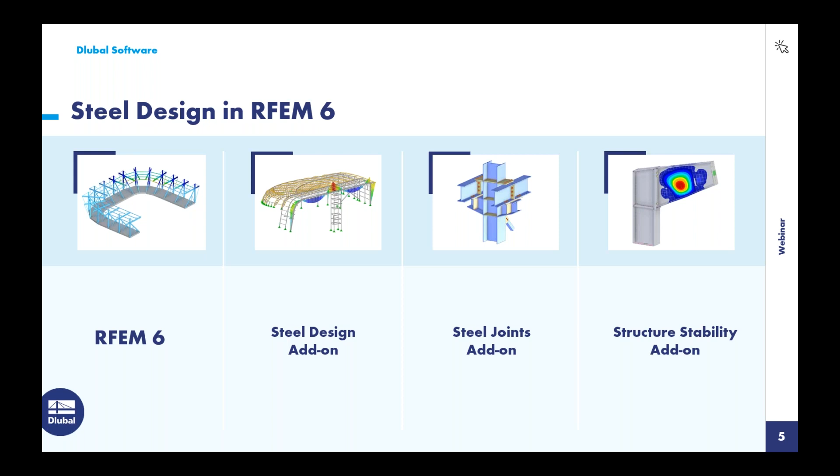Today we'll be focusing on the steel joints add-on. Within this same RFEM model, we can carry out the connection design according to AISC. I also mentioned the structure stability add-on - this is needed if we want to carry out an eigenvalue analysis for our connections to determine the various buckling mode shapes, which we'll see in our example today.

Our steel joints add-on is unique in the sense that for every single connection, we generate an FEA model underneath the hood. So we might be wondering, what is the benefit of FEA for steel connection design when compared to standard analytical calculations? The first and probably most obvious is that we can now design these non-standard connections.

We're no longer limited to standard beams, to columns with maybe one or two braces, but rather any connection that can be created with these various components can be fully designed according to the AISC, such as the example you see on the right-hand side.

This does include components and members both in plane and out of plane. So we're not restricted to design in a single plane, but rather we can include all of these elements at one time for the full design.

We also can consider complex loading because we're integrating the full global RFEM steel structure with the connection design. We have the ability to consider all of the loading within RFEM itself - whether member loads, point loads, or perhaps integrated with surfaces that have additional loads. This is all considered with the connection design with the automatic member end force transfer.

We also automatically generate what we call this submodel underneath the hood. So it really doesn't require a high expertise level - rather, if you just have a general knowledge of FEA, because of this automation, this will all be done automatically.

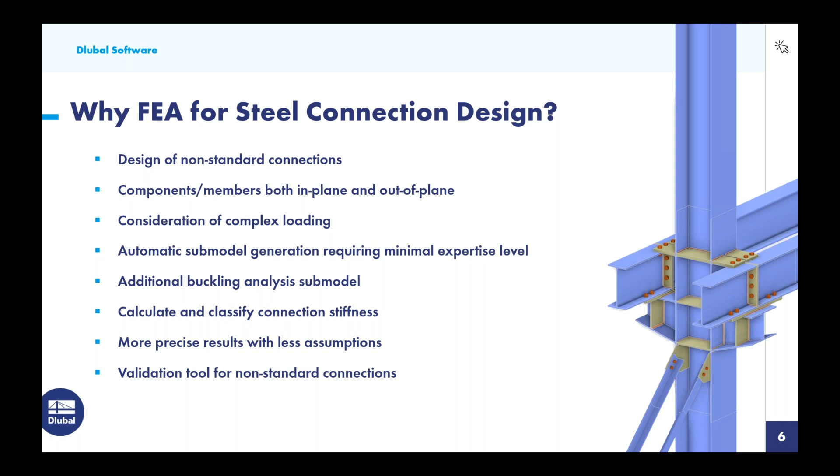So all in all, we'll have more precise results with less assumptions, especially for these non-standard or very complex connections. Even if we're using hand calculations or some type of external program, RFEM and the steel joints add-on can still be a great validation tool just to confirm that our assumptions are correct.

So let us talk more about this submodel that's automatically generated, and we can see an example shown here on this slide. So all of the members, beams, columns, braces, these 1D member elements, are automatically converted to 2D surface elements in this submodel.

So we're talking about the flanges as well as the webs. These will all be converted to those 2D surfaces considering the correct thickness and the material. We also consider the bolts and welds, which are also converted into 1D and 2D elements in this submodel.

Now, in the RFEM model, we likely have defined linear elastic materials for our members. In the submodel, this is automatically converted for all those surface elements to nonlinear plastic materials instead. So no additional add-ons are needed for this; it is automatically done with the steel joints add-on.

Additionally, we'll see geometric nonlinearities applied automatically in the submodel. So for example, with two end plates, we should see those plates release in tension, but in compression forces, we'll see them bear upon one another.

Again, we talked about automatic member end force transfer. So all of the load combinations, such as according to the ASCE 7, are automatically brought into this submodel as member end forces, and we'll run through the separate calculations for each load combination.

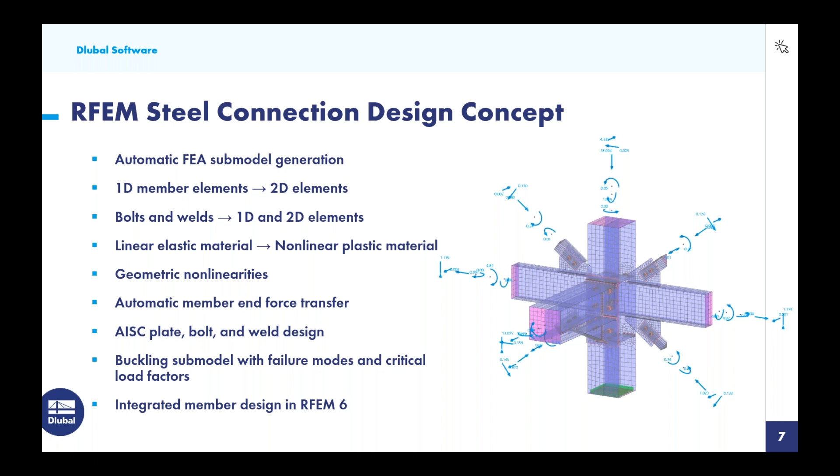So turning now to the AISC 360, the new 2022 updates that are relevant for RFEM only, we're talking specifically about connection design. This list is rather short, just one simple section to consider: Section J2.4a for welds and welded joints, in particular the fillet weld strength calculations.

There were some clarifications and revisions made to section J2.4a and b. The main reason is because we have adjusted equation J2-4 for fillet weld design to now include this directional strength increase factor K sub ds. K sub ds is calculated according to equation J2-5, unless we have a rectangular HSS, in which case this value should be set to 1.0.

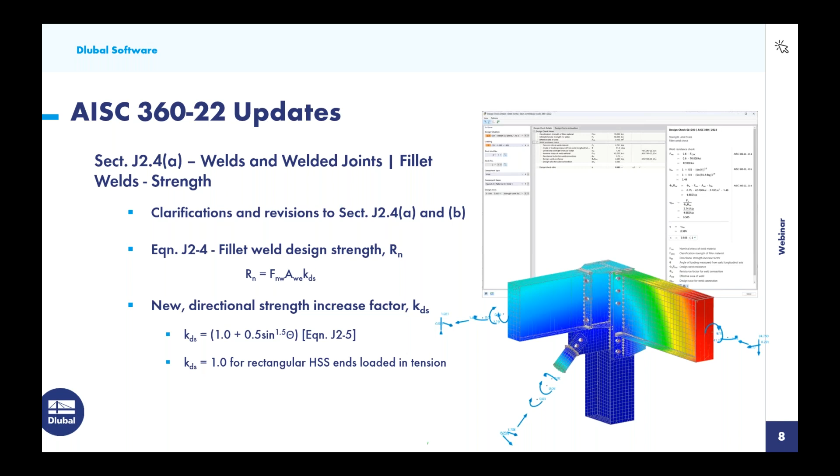So now moving on to a few of the updates that we have implemented in the steel joints add-on over the last year. This isn't an exhaustive list, but I just wanted to focus on a few of the main points. The first is the preloaded bolt input option.

So now we have the ability to consider these preloaded bolts, where the submodel automatically includes the applied bolt pre-stress force. In addition, we're going to see an increased surface friction coefficient for those plates that are in contact. Now, the load pre-stress within that submodel does come from AISC table J3.1, referencing that 0.7 factor times the bolt tensile strength.

So the advantages of a preloaded bolt or slip critical connection really increases the joint rigidity and tightness. Also, we're going to see that increased contact stress in the plates before additional loads have been applied. If we have a high vibration environment, we're obviously going to see better control of the loosening of the connection, and other benefits.

We also now calculate the connection stiffness and further classify this. So we have the ability in the steel joints add-on to calculate the rotational and axial stiffnesses for each member that frames into that connection point. Two values for each of these are going to be provided.

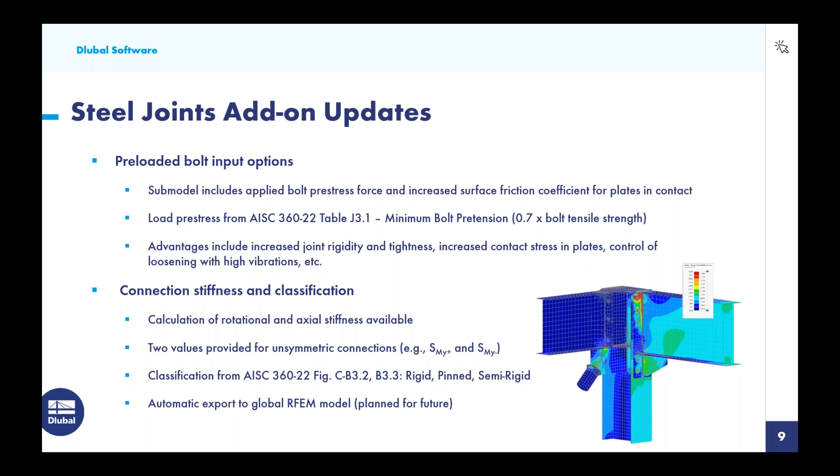A few components and capabilities that we have also added: inserted member is a new component, and this might be important for connections with stubs, or perhaps we have fly bracing, intermediate connection pieces, and so on. Another component we've added is called auxiliary solid. Sometimes with plates or members we require some modifications that are rather complex, so these new auxiliary solids with boxes, cylinders, or sections allow us to make these modifications, such as a plate cut, for more complex geometry.

We also have added a cap plate. This automatically positions a plate with the correct dimensions and weld definitions, for example, to the top of a member. We have a new rib component, which is a quick stiffener element that exists between two plates, and this is really going to reduce what previously took many other components to create. So a much more efficient option now.

We also have the connecting plate notch member, which we'll see in our example today. Also with the same connection, we can automatically weld the connected members to the gusset plate through member notches. This will be a very efficient input as well that we'll see.

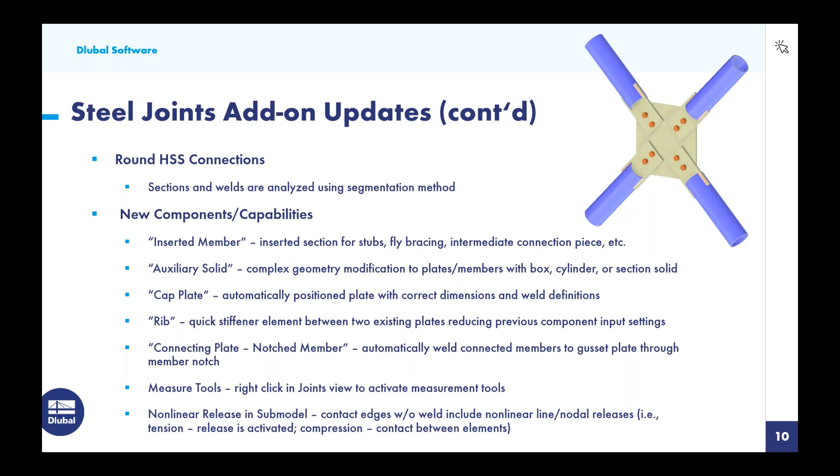All right, so we will move to our RFEM example today. For those of you who joined us last week for the full member design according to the AISC, this is an identical model here. I again will refer you back to that webinar to learn more about the member design, but let us quickly go through just a quick model review.

For the cross sections, we do have W12 by 50s for our columns, W18 by 40s for our girders, W16 by 31s for the smaller transverse beams. And then for our X braces, we have round HSS members, 4-inch diameter by 0.25-inch thickness.

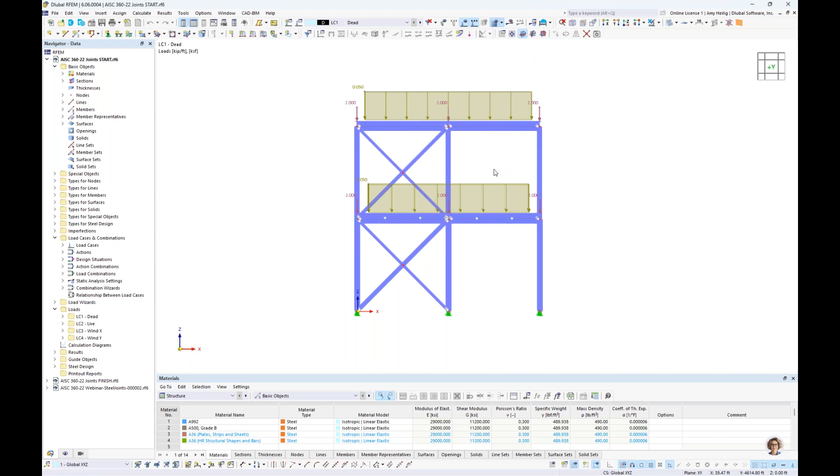As far as the loading, this is also identical to last week. So we have 4 very simple load cases for today: dead, live, wind in the X, and wind in the Y. Now I did make one minor modification here. When we compare to last week's model, you'll see here that for dead load we do have the surface loads applied to the surface load transfer elements, but I did apply additional member loads that you'll see here to those girders. I wanted to see a little bit higher internal forces and stresses with our connection design.

Additionally, same concept here for live load, that we have these surface loads applied, but I have also added a couple of point loads at 2 points along those transverse beams as well. We also have wind in the X direction, taking advantage of our load wizard here. We can right click to display those - these are just distributed to the members based on their tributary area. Same concept here for wind in the Y direction, and we can right click here to display those as area loads instead.

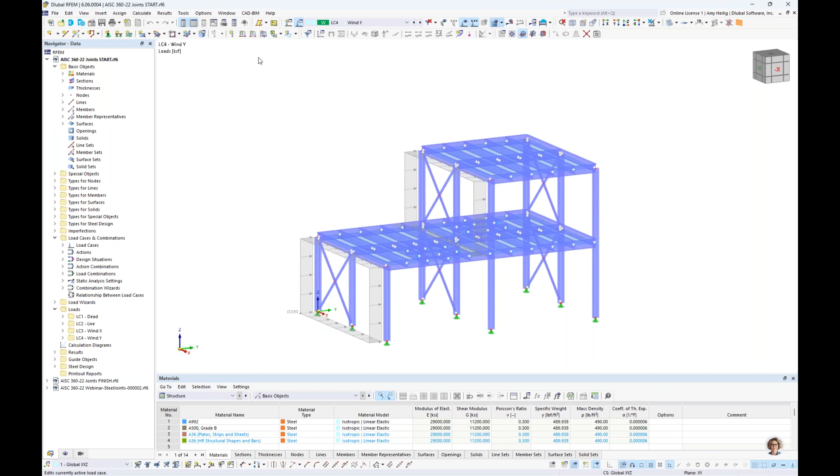Now, we also talked about last week how we are generating the load combinations automatically according to the ASCE 7, the new 2022 standard. Under the design situations, the program will automatically create 2 design situations for us. The first is going to encompass all of our factored load combinations.

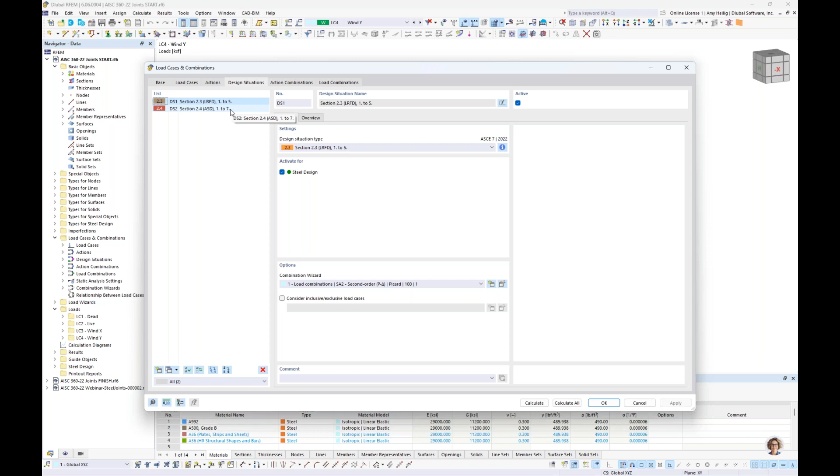This comes again directly from the ASCE 7. The second design situation includes all of the unfactored load combinations, and we use these for the strength and serviceability design of our members utilizing that steel design add-on.

Now for our connection design, we're only going to utilize this first design situation. Under the load combinations, if we'd like to see those individually listed out, we see our factored load combinations here in orange and our unfactored load combinations in red.

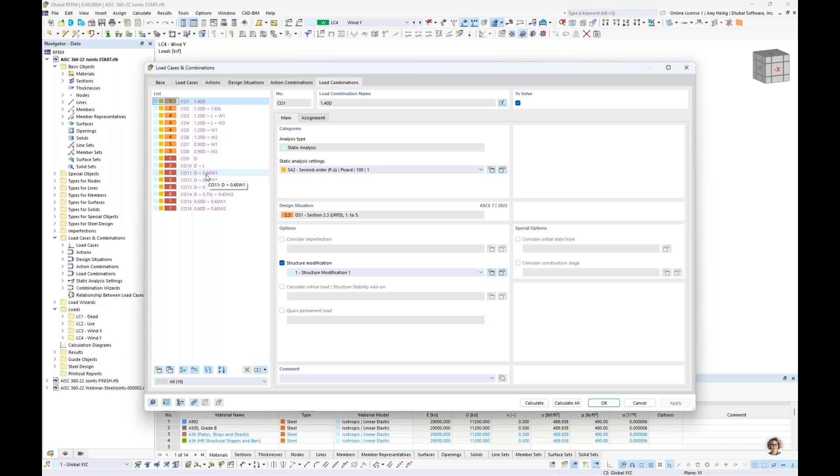To quickly revisit the steel member design, I will go to the table here and drop down to the steel design add-on. If you remember from last week, under the design ratios by member, ultimately we are going to get full member design here.

If I click on this back girder, you'll notice that all of our design checks from the AISC 360 are listed here. For each one of these, we further have the ability to take a look at the design check details. This shows us line by line with these various formulas, along with the code references and the relevant design ratio for the member design.

Once we feel comfortable here with the member design, what we would like to do is the connection. So I'm going to go back to the navigator and right click on my model name to access the base data dialog box. This is also available up here in my toolbar.

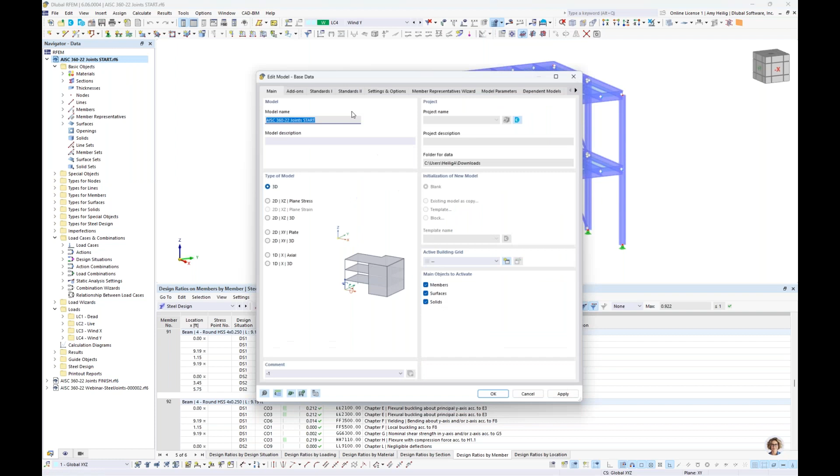Within this dialog box, under the second tab are the relevant add-ons that we have available within RFEM. We've already taken advantage of the steel design for the steel member design, but now we would like to activate here the steel joints for our connection design.

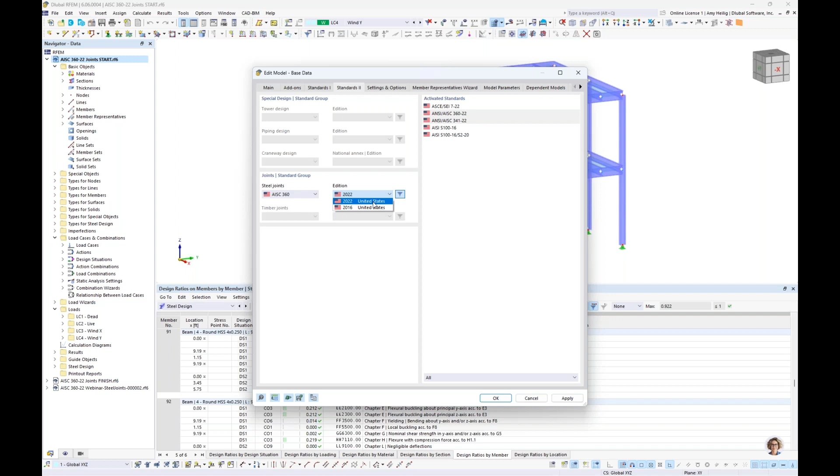Under the fourth tab is where we would set the relevant standard to the AISC 360. You'll notice here we do have the 2016, but we also have the most recent 2022. Once this add-on is activated, we're now ready to define here our first connection.

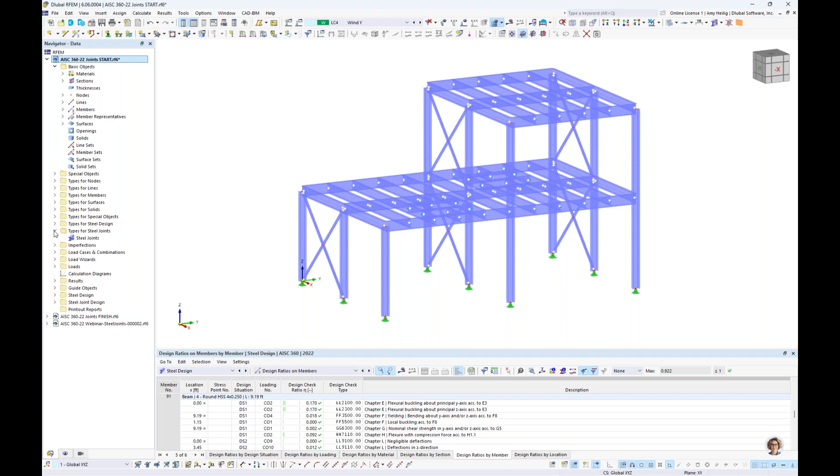I'll go ahead and turn off my surfaces graphically just so that we can see our members in better detail. Because we have activated here the steel joints add-on, we have a new folder within our navigator called types for steel joints. So I can right click to create my first definition.

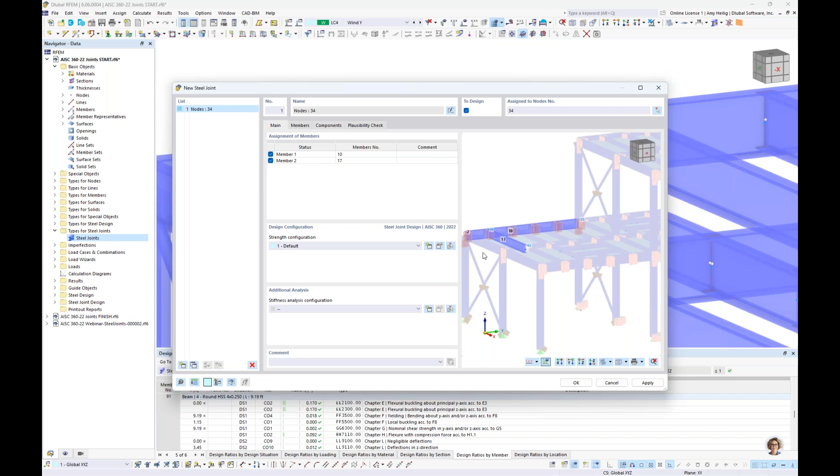Now, I'm going to graphically select my node here and we're going to focus on our beam to beam connection. So we just simply click on graphically node number 34. We see the relevant members highlighted here in our view, and under the second tab are the listed members.

You'll see here that we have 2 members within our table, and under the second column is the type set to continuous or ended. Member number 1 in the rear is set to continuous because it is continuous through this connection point. Alternatively, our second member here is set to ended because it does end at this connection point.

Because we are generating the FEA model automatically underneath the hood, we do need to support at least one of these members at the member start or member end at a minimum. The program will go ahead and suggest that it will support our member number 1 at the start.

So then we have our components. We can individually insert the connection components here. You can see the different categories where I can insert a plate, or perhaps a haunch, or maybe for this connection, we will take advantage of a cleat.

Now, alternatively, we can also utilize our library. So if we launch the library, what you will further see are some various connections already defined for us.

We have rigid connection under the general categories. We also have pinned, truss connections, as well as brace connections. Looking at our general pinned category, we then have further subcategories like beam to column. So when we look at beam to beam, we have 3 additional options, including a cleat.

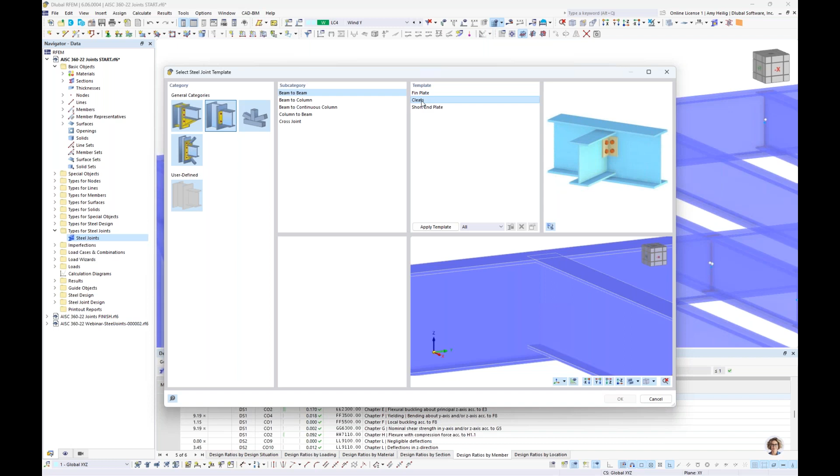So we can hit apply template, and the advantage of this is that these components that are already defined within this library will automatically be applied to my model.

Now, when I look at this preview, I actually don't see my cleat generated, and that's just simply because I need to switch these 2 members within the dropdown. My continuous member is actually member number 1, and the member that ends at the connection is member number 2.

And now we see this cleat generated graphically for us. We also can select here the material of the cleat.

Now it's possible to also define this later on under the individual component, but if we have our material available, we can select it here from our dropdown.

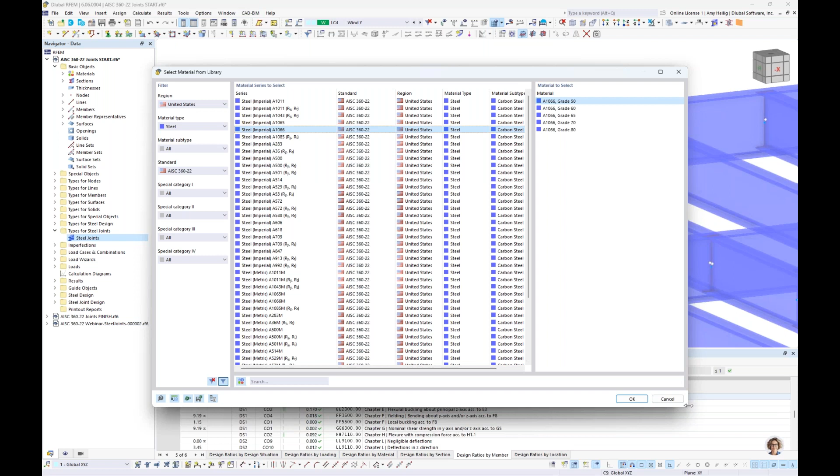Alternatively, if we do not see our relevant material, we can choose the new material option here. This will allow us to launch our material database where we can use our filters on the left to filter to the United States, to steel, and to the new AISC 360 2022 standard. Pretty much every material should be available here. You'll notice there are additional subcategories as well. So once we find our relevant material, we could select it within this material library.

Now for my scenario, I already have the material defined, A36 for structural shapes. I'll go ahead and select it here. So when I click OK, you'll notice that this component was automatically brought in here into my table. We will need to make further geometry modifications because this is just generalized to bring in the component, but we need to set it up specific to our model.

The first thing to define here is the offset between the 2 members. So we're talking about this gap here. I'll go ahead and reduce this to 0.25 inches and we graphically see that update. Now the material for the cleat has already been defined, but again, we can make changes if we'd like.

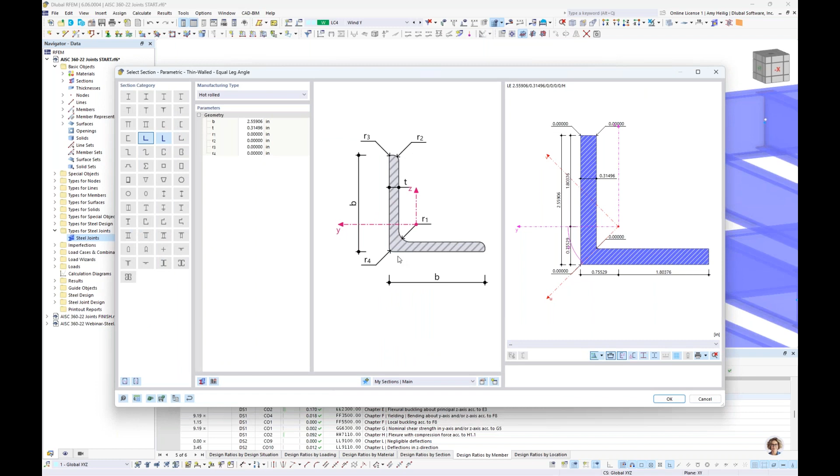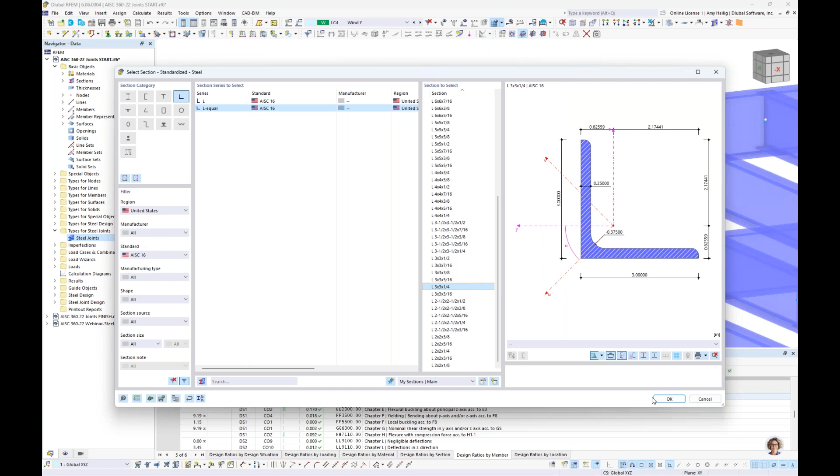The cross section for the cleat is automatically set to a parametric section where we can input the dimensions. Alternatively, if I hit this back button, I can take advantage of the standardized sections directly from the AISC. You'll notice the 16th edition database, which is the most recent, is implemented here. And I can go ahead and select a single angle 3x3 by 1/4 inch thick. So I click OK, and we'll see that cross section automatically update here.

Now, rather than defining the offset, I'm going to define the length and the position. So the length of this cleat is going to be set at 10 inches. The eccentricity will be set to 0 so that it's simply centered at half the depth of the beam.

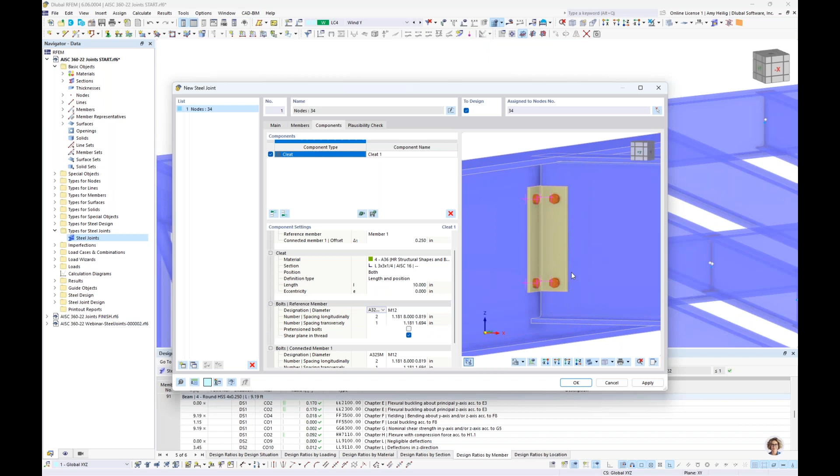Now we want to move on to our bolts. So we'll begin with the bolts on the left where we will set these as A325, 1/2 inch diameter from our dropdown. Currently there's 2 bolts defined, but I'm going to increase this to 3. The second input settings are the spacing. This is set up to specify the distance from the top of the cleat to the center of the first bolt, then the center of the first bolt to the second to the third, and so on.

So my spacing from the top of the cleat to the center of my first bolt is going to be 1.625 inches. I then hit the space bar on my keyboard and input the spacing from the first to the second bolt, 3.375. I hit the space bar once again and input 3.375 again for the second to third bolt spacing. Now I do not need to input the distance for that 4th spacing - the program is intelligent enough to know what that distance is, so it will automatically be input.

Now the number of bolts in the transverse direction are set at 1. If we want to modify the spacing from left to right here, we start off with the space from the edge of the cleat on the left to the center of the bolt, and this is set at 1.375. Again, if I just hit enter, the program will recognize the distance to the center of the cleat here automatically.

We talked about in the PowerPoint the new ability to specify here if they are pre-tension bolts for this slip critical connection. This is a simple checkbox here that will affect the submodel. It's not applicable for our connection, so we'll go ahead and leave this unchecked. We also have the ability to define if the shear plane is in the thread, which will ultimately affect the bolt strength in our calculations. This is a simple checkbox as well.

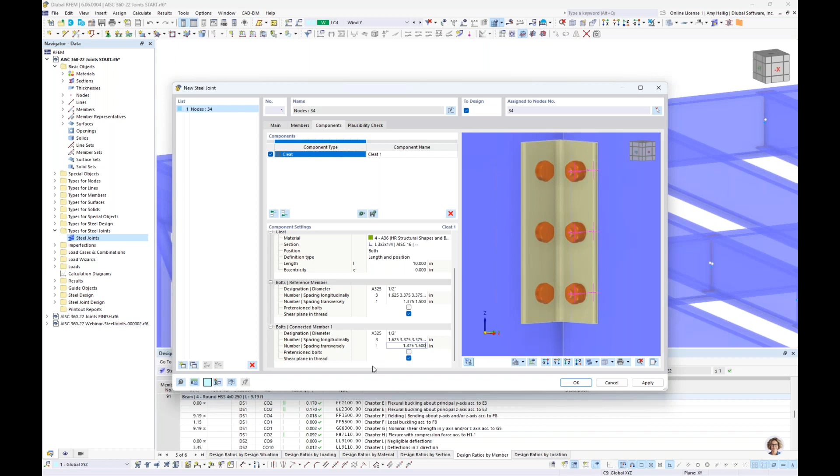Then we move on to the bolts on the right-hand side. So we will also specify here our A325 bolts, 1/2 inch diameter. We're going to increase the number to 3. Now, as far as the spacing, it's relatively easy to go back to the left side. I hit Control C on my keyboard, and then I can hit Control V to paste that to the right-hand side, so I don't necessarily have to manually input that in if we want to replicate the spacing on the left-hand side. Same concept here for the spacing in the transverse direction - we can go ahead and copy and paste there as well, and all of that will be updated graphically.

Now our cleat is complete with all of our input. If we go to the plausibility check, this will flag us if we have any errors within the connection. Remember, we are generating this FEA submodel underneath the hood, so if there's any errors such as overlapping elements, or perhaps a bolt is not placed where it should be, the program will flag you of this. Otherwise, the submodel cannot be generated.

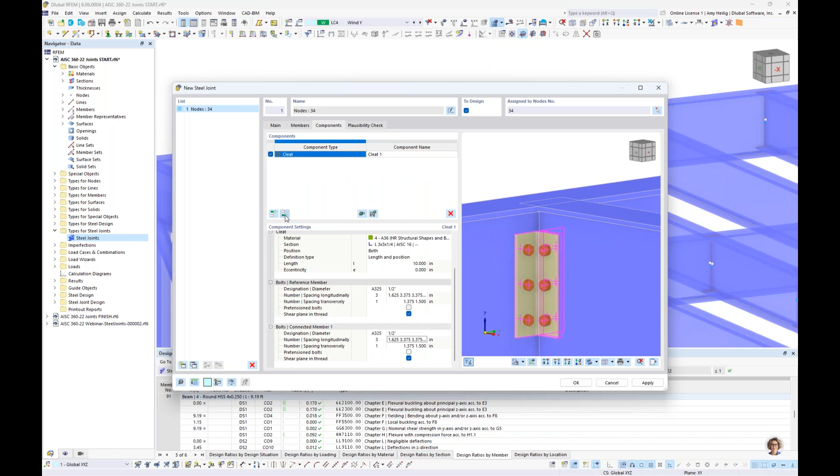In our case today, we have a couple issues telling us that the flange and the web from the smaller beam is conflicting here with the flange of the larger beam. So we go back to our components and we need to add in a new component here, and what we want to select is called member editor.

You can see how we can use the library options to bring in a starting point for a connection, but we can always add more components, delete components, or make modifications to those existing components.

Now with this member editor, what you'll see here is that we want to select member number 2 within our dropdown. Rather than specifying a chamfer, we will select a notch, and we need to give the notch some dimensions. So I'm going to choose here 0.75, hit the space bar, by 3 inches.

We also have the ability to add in a rounding here for our radius input, so we'll set this to 0.375, and we'll see that rounding affected graphically. Lastly, the program asks us if we want to apply this to both the top and the bottom. There really is no need to apply it to the bottom here, so we will just select side number 3 only. So now we see that notch.

We should check under the plausibility. There are no errors found, so therefore we've taken care of any issues there.

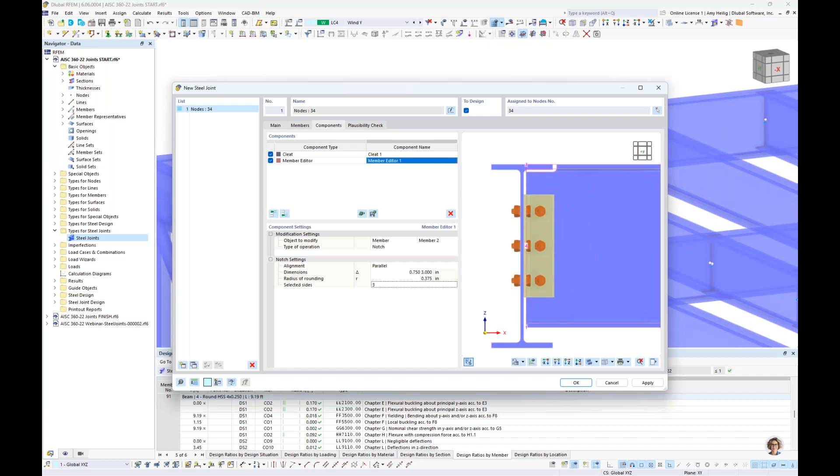If you want as well, just to show you, if we right click we can take advantage of that new measure tool. For example, we can choose the distance between 2 points, and the program will allow us to snap from one point to another. Graphically, this will bring up a separate dialog box showing us further information about that particular measurement. It might be helpful for any input that we want to place within the component itself.

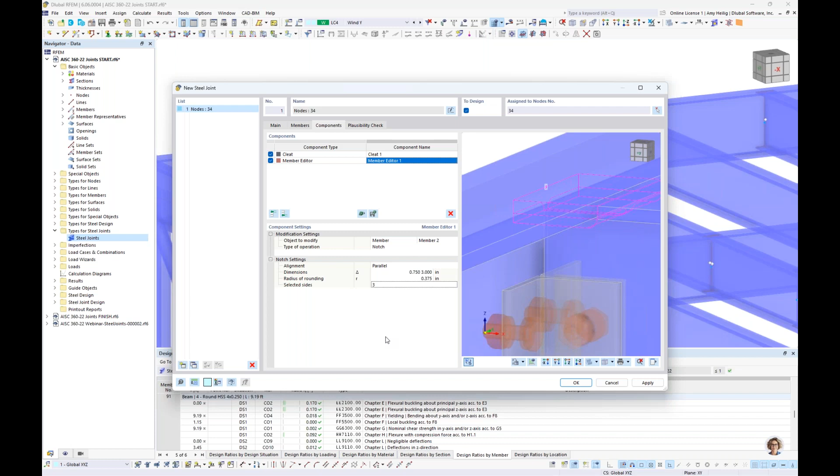So now that we are done with this first connection, we click OK, and we're brought back into the RFEM global model. You'll notice here that my connection is displayed graphically. We have the ability to also turn this to wireframe while still displaying this connection.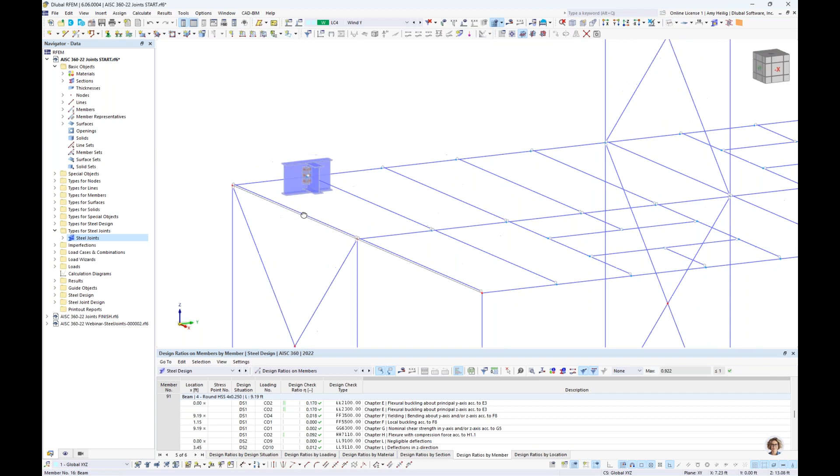I just wanted to explain that the full member design is still carried out from node to node. We're not going to stop this member here where the connection design begins, but rather the full member length is considered. In addition, the member end forces are taken at this specific node, not at this short distance away from the connection point. So this is really just a general view of that submodel that will be created again in the background.

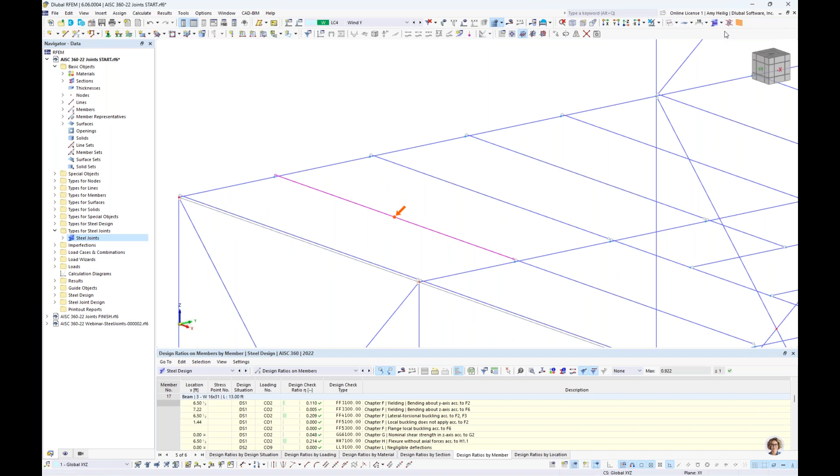You also have the ability here, if we go back to - I'll keep this in wireframe view - you'll notice that we have a new option here to show no joint model. If we wanted to completely hide it, we also have the simplified option here, or we can go ahead and keep it as a detailed joint model.

So this particular connection is also applicable to many other locations on this structure. You don't necessarily need to redefine the connection each and every time, but rather we can select multiple nodes to apply it to. This also is true for the other side of the structure, even though these elements are mirrored, as long as the geometry and the members are identical, this same joint can be applied to multiple nodes.

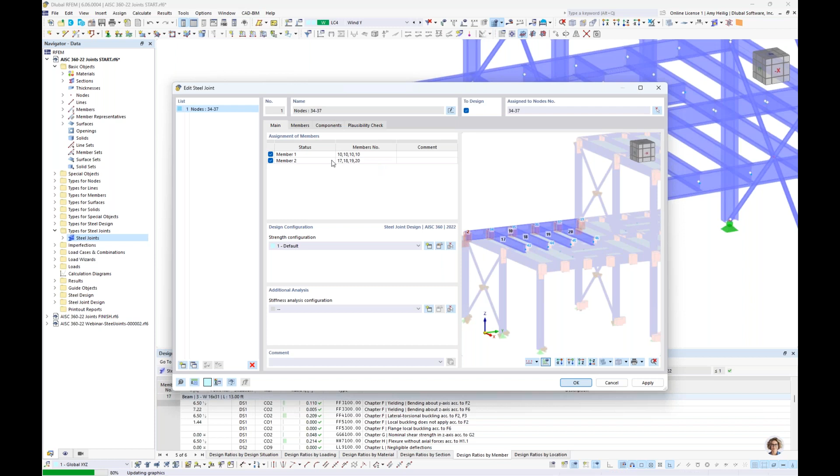So we go ahead and double click on it, and to take advantage of that, we can select here some of the adjacent nodes that again have identical geometry. So we select nodes number 34 through 37, we see them selected here in the graphical view. I click OK, and we'll go ahead and turn this to a solid view. We see those connections shown at each one of these locations, probably even more clear in the wireframe view.

So we are now complete with this first beam to beam connection. We want to then create our second definition here for our X-brace connection, so we right click to yet again create a new steel joint definition.

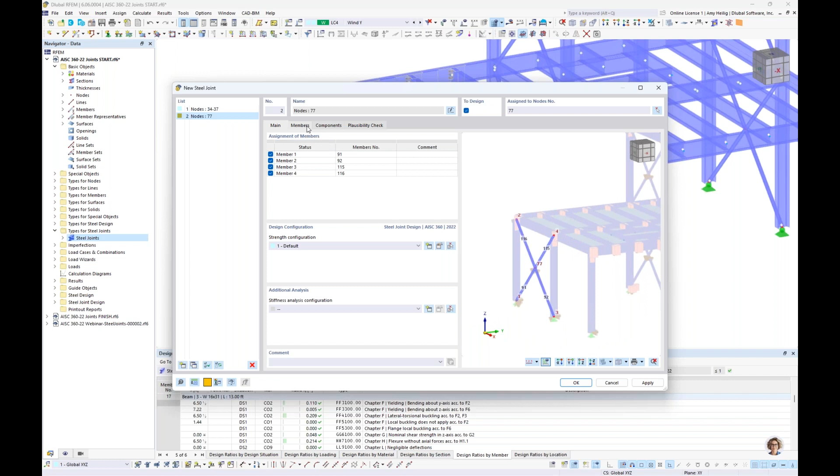We can still refer back to our previous one, but now we will select graphically here node number 77. We click OK, we see the relevant members highlighted, and under the Members tab, we see that all of them are set to the type ended.

That's simply because all of these members will end at this connection point. We do need to support at least one of those members for the FEA submodel, so we'll leave this as the default for member number 1.

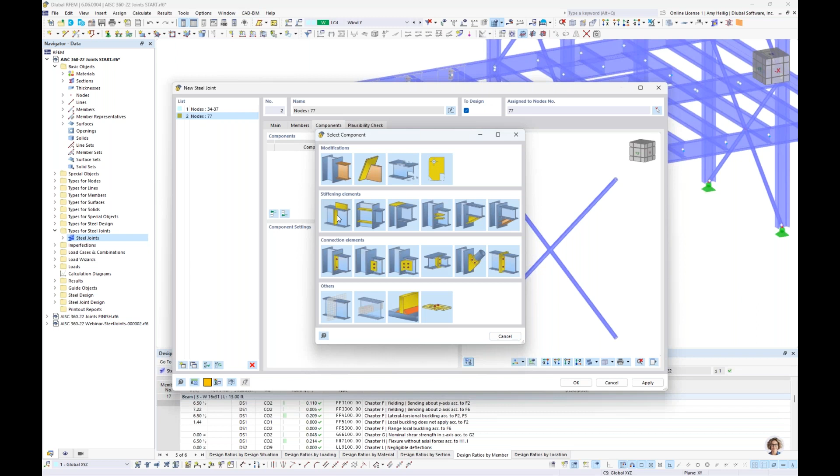Under my components, this is where I actually want to add in the individual components rather than using my library. So we will begin here by first inserting in a plate. We give the plate a material that's already available here within RFEM, so I select it within my dropdown as A36 for plates. The thickness is left as default here, 0.375.

The width will be adjusted to 13.75, and the height will also be 13.75. We see this adjusted graphically here as well. But clearly we need to make some modifications to this plate rotation.

So we can turn on the local axis system of the plate itself. I am going to rotate it 90 degrees about the plate's local x-axis, and further rotate it 45 degrees about its local y-axis. We'll go ahead and turn those local axes off, and now we see a better orientation here for the plate element.

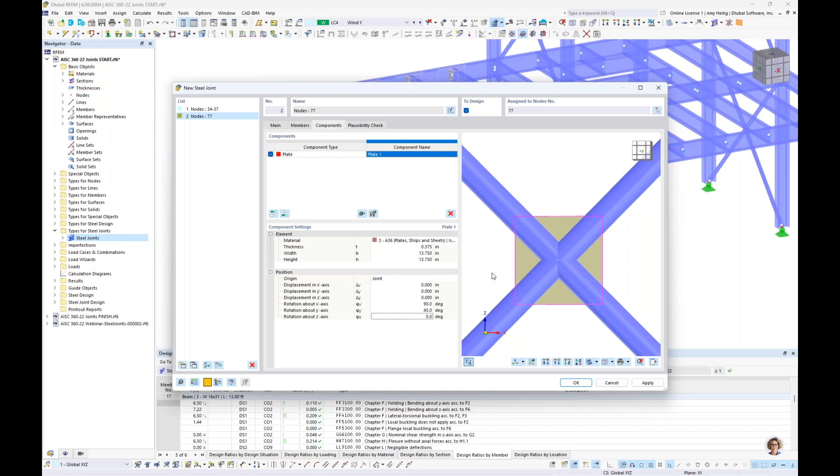We then move on to our second component, and this one is going to be the plate editor. We want to apply this to plate number 1. It will be a chamfer, and the dimensions of this chamfer are going to be 3 inches by 3 inches, applied to all sides here. And so now we just see that quick geometry change applied graphically.

We then add in our third component, and this one is going to be of the type connecting plate. As mentioned in the PowerPoint, this is a new feature we recently added where I can select member number 1, and we have the drop-down option to create a notched member with a tongue plate. If I rotate this around, you'll notice that this tongue plate was automatically created, attached to this bigger plate here by means of bolts.

We added a notch into the member, so we've significantly reduced the number of components it previously took to generate this.

Now moving on to the plate element itself, we want to adjust here the material to A36 as well. The thickness for the tongue plate will be left at 0.375. We want to adjust the offset though to 3 inches.

The remaining width is going to be set to 6 inches, and because I set my total X indentation to 9 inches here, and we also see the overlap in the remaining width set at 3 and 6, the program is intelligent enough to set automatically the width to 9 inches.

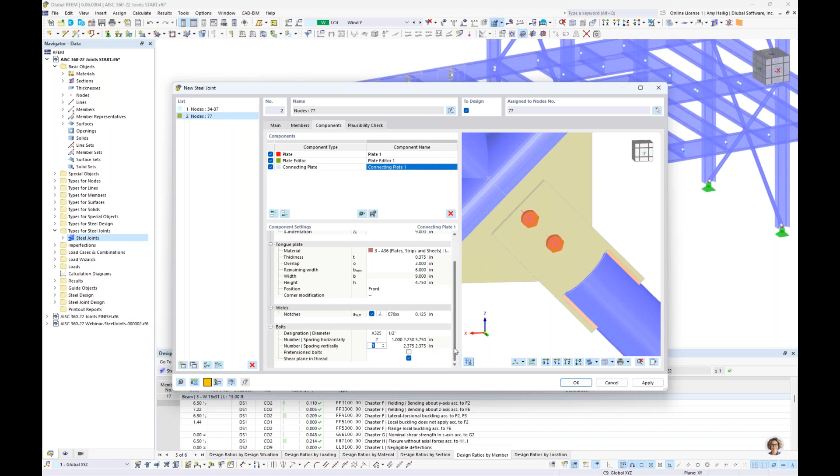Now the spacing in the vertical direction is automatically centered on the tongue plate, so we don't need to do anything further here. Now that we are done with this component definition, it's easy enough to right-click here to make a copy of this component at the end.

We're simply copying everything that we've just defined, but we're going to do it a total of 3 times because we have 4 different members framing into this connection. So under my second connecting plate component, I'm going to scroll up, and rather than selecting member number 1, we want to change this to member number 2. The only adjustment that I will want to make here is to modify my X indentation to 9 inches.

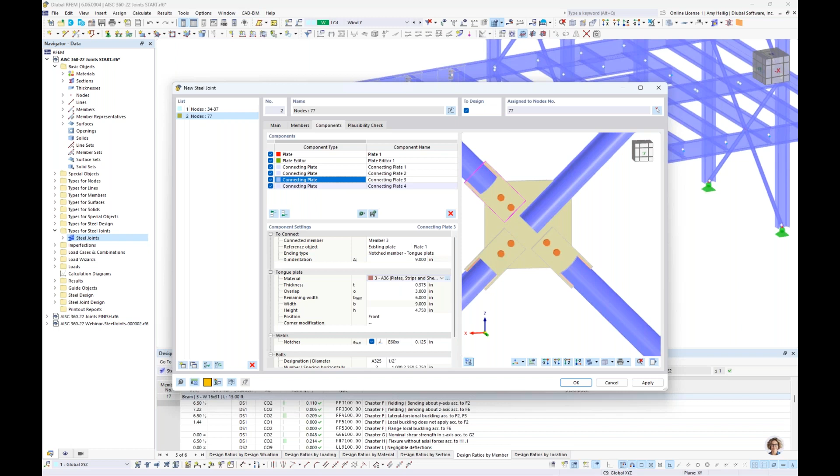We'll do the same thing for our third connecting plate by changing this to member number 3, and automatically adjust the X indentation back to 9 inches. Finally, we'll do this a fourth time for member number 4, adjusting that X indentation to 9 inches as well.

So essentially, our connection design component input is complete. We can jump here to the plausibility check, and we don't see any errors found.

We now have the ability to save this connection to our library as well. We could give it a name, select the category, or if left empty, it will be placed in your user-defined category. We can also create additional subcategories—you'll notice I've already created the category X Joints.

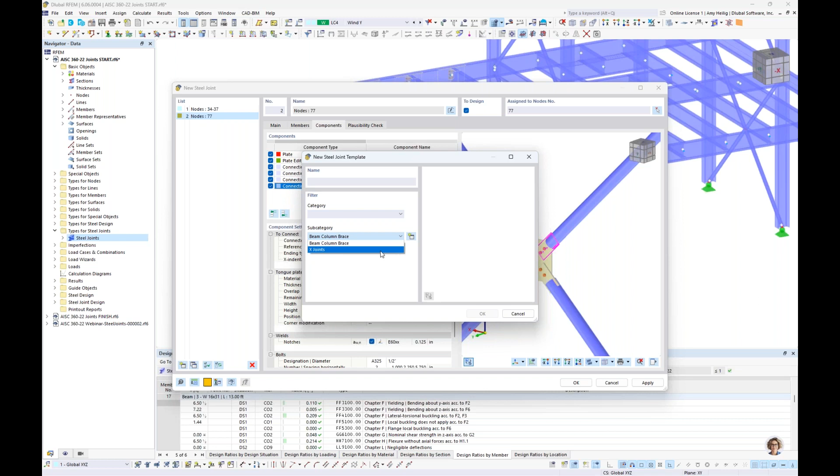It's really encouraged to save these connections to your library so that it's available for any future RFEM models. You can pull that open, all of these components will be brought in, and you can just make simple changes to the component input.

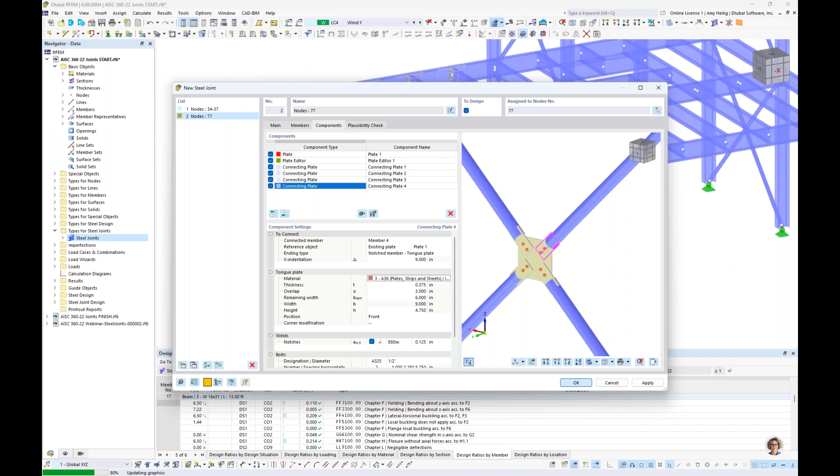So we go back to the RFEM model, and we should now see the display of this connection graphically. We'll turn this to a rendered view, and sure enough, it's displayed here at our X braces. But remember, in wireframe view, we still have the design of these X braces to that particular node—the full member length is just a representation of that submodel.

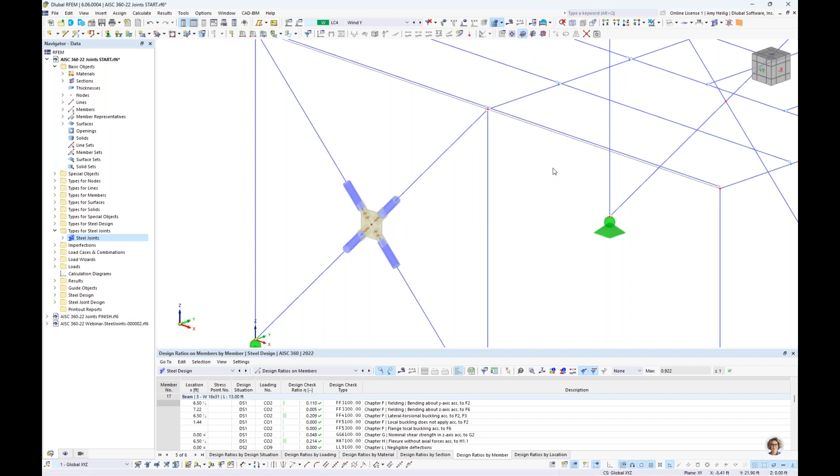We're now ready to create our third and final connection, for this node where we have 2 beams, a column, and a brace framing in—a little bit more complex than what we've seen with the other two.

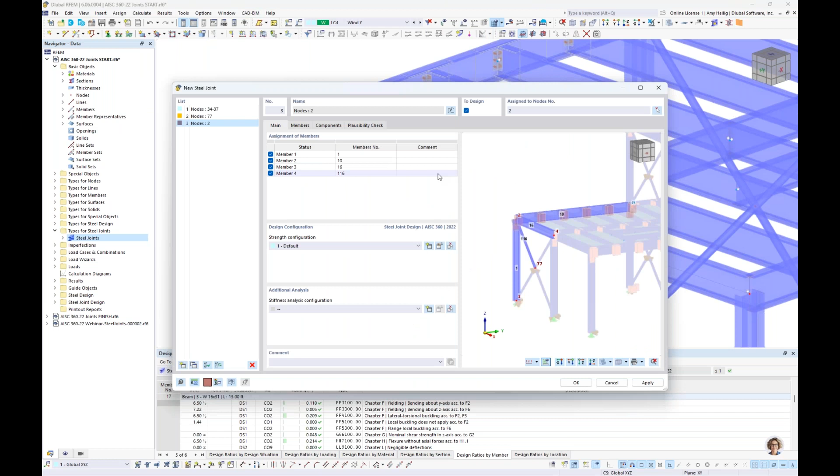For the last time today, we'll right-click to create our new steel joints definition. This time we want to select node number 2. We see the relevant members brought in, and again all of them are set to ended with the relevant supported end set by the program's default option.

Now, to individually input these components will take a little bit of time, so what I went ahead and did is create this connection and save it to my library. We'll launch our library, and under my user-defined category I have my specific subcategory where I can simply hit Apply Template. You'll notice all of these components have been automatically generated, saved to the library, and now we're applying it to my specific model today.

All of these components are listed here with the relevant materials. If we needed to change around the members, we could do so, but everything should be set for this example. So I click OK, and you'll notice all of these components automatically input here.

Just to touch on a few of those new features we talked about in the PowerPoint, we'll zoom into this connection and see a nice rendering of it. The cap plate is a new component—you can see this cap plate automatically inserted at the top of my column. It's not a standard rectangle or square; we can make some geometry modifications to it as well.

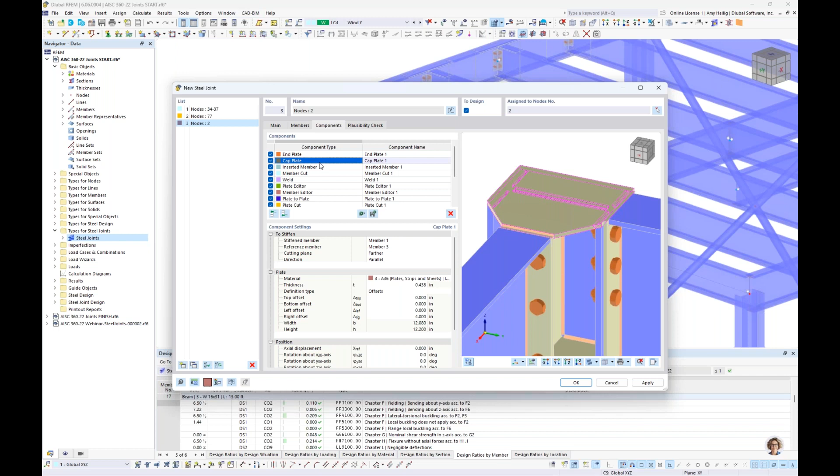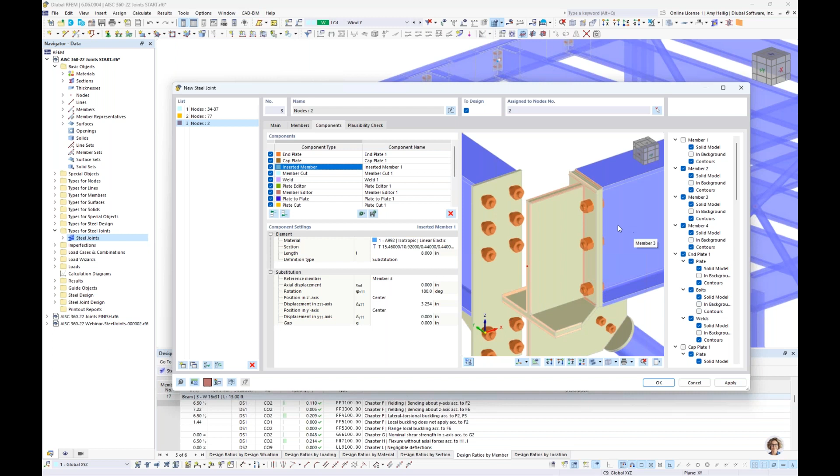You'll also see here the new component, the inserted member. It's probably best if I hide a few of these components, such as member number 1, or the column, and maybe my cap plate as well. This inserted member is an upside-down T-beam here that is welded directly to the column web, and it extends out, connecting with a plate-to-plate connection back into the beam. I just wanted to point out one of these new components available within the last year that we've implemented.

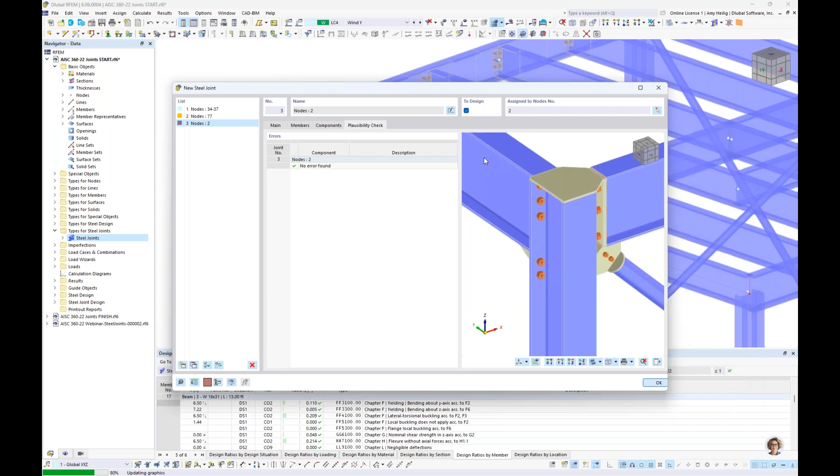Once we have input all of the components and checked the geometry, we jump to the plausibility check—no errors found, this is great. We click OK, and we're brought back into the RFEM model so we can see a graphical representation of that connection. I'll rotate this around and zoom in, and we see all of our components graphically represented within the global model.

Now, before we run the calculation, let's go back to the steel joints add-on. We have here these strength configuration settings for each one of these connection definitions. If I go into the detail settings, the first thing you'll notice is the ability to carry out the buckling analysis.

So again, you need to have the structure stability add-on to have this capability. If you do own it, you can go ahead and turn this on. We get a new tab here where we can carry out that separate submodel.

We will have the ability here to specify how many eigenvalues to calculate. This is set at 4 by default. We also have some other settings specific to the design check. You'll notice here the plastic strain limit is set at 5%.

This is a really important topic and is often asked about. So let us go back to the PowerPoint to explain this a bit further. We are going to check the plastic strain limit.

For our plates, this is relevant for our flanges, our webs, any of the gusset plates we've defined, haunches, and so on, because in the submodel, these are converted to 2D surfaces. We probably have initially defined these as linear elastic materials, but in that submodel, they're automatically converted to nonlinear plastic materials. With this material model, we will apply the von Mises yield criterion stress failure hypothesis.

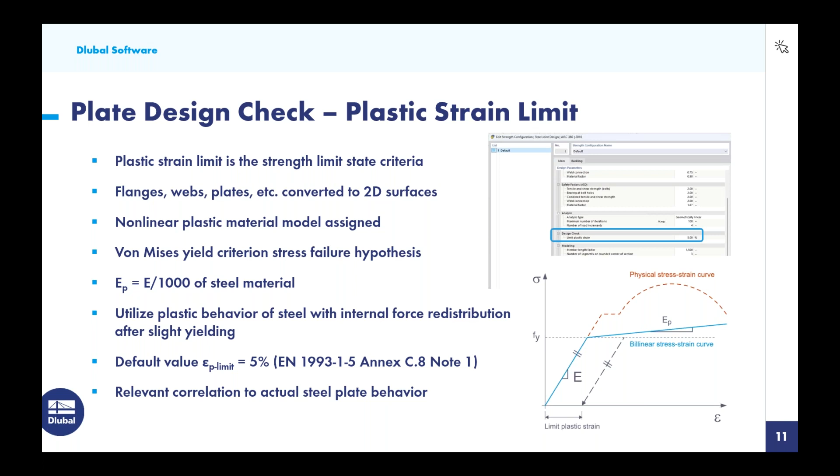When we reference the AISC, there is no specific reference to what the plastic strain limit should be set to when we are considering FEA modeling for connection design. So therefore, we do refer to the Eurocode, but this is fully adjustable in the program. There have been many studies carried out for actual steel plate behavior compared to this FEA approach, and there has been found relevant correlation, so it is an accepted approach.

So we go back here to the steel joints add-on, and again that 5% can be found here, but it is fully adjustable by the user. We also have the slip coefficient for slip critical connections, as well as the bolt pretension factor. This is for those preloaded bolt options. The 0.7 factor comes directly from the AISC table J3.1.

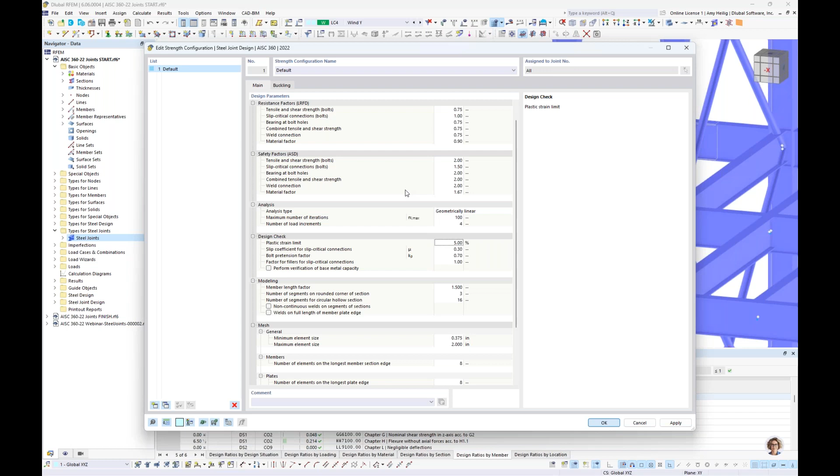Once we have input all of our configuration settings, the final thing to do here is to talk about the stiffness calculations, which I mentioned was a new feature that we recently added. Taking a look at our last connection here, the more complicated one, you see this new ability to carry out the stiffness analysis. We do have a configuration setting here that's default, so we'll go ahead and select that and take a look at it. You'll notice that we will calculate the initial stiffness of this connection for the relevant members.

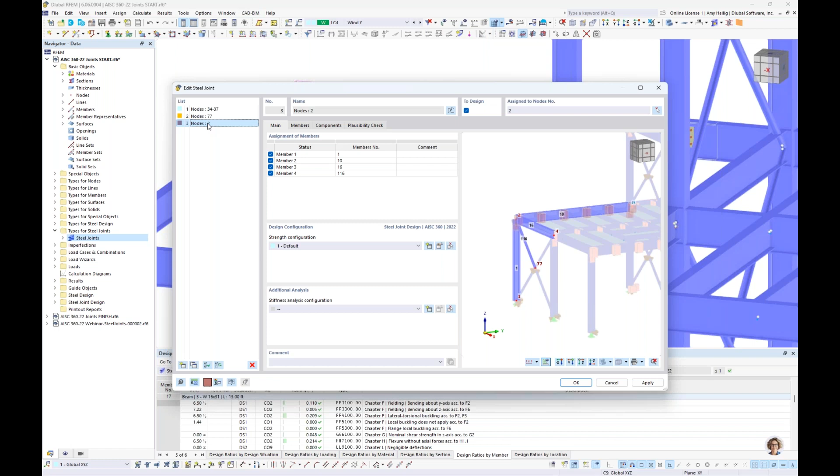These features are still in work, but they should be available in the coming weeks, in particular the ability to export this stiffness back into the global model automatically.

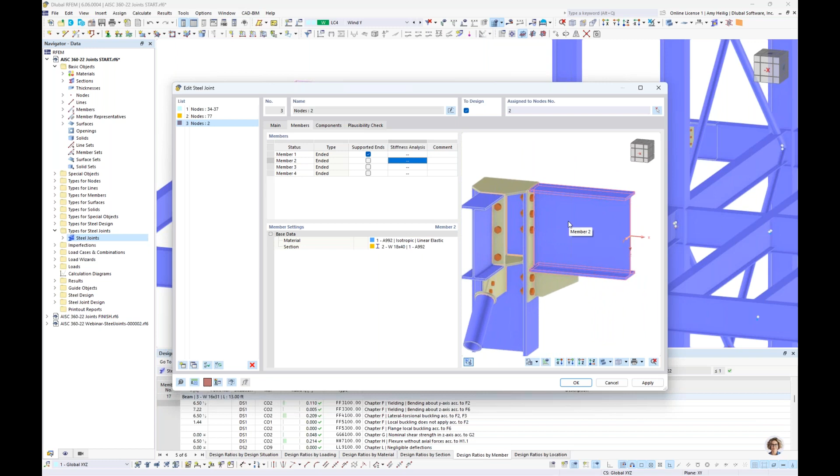Because we have activated this under our second tab for our members, if we scroll into this connection, I'm interested in calculating the rotational stiffness for strong axis bending of member number 2, framing into the flange of my column.

Because I've activated the stiffness analysis, I have a new column where I can calculate the axial stiffness, the rotational stiffness for strong axis bending, or rotational stiffness for weak axis bending. For this one, I'm going to activate only strong axis bending. Once we have this set in the column, we see it populated.

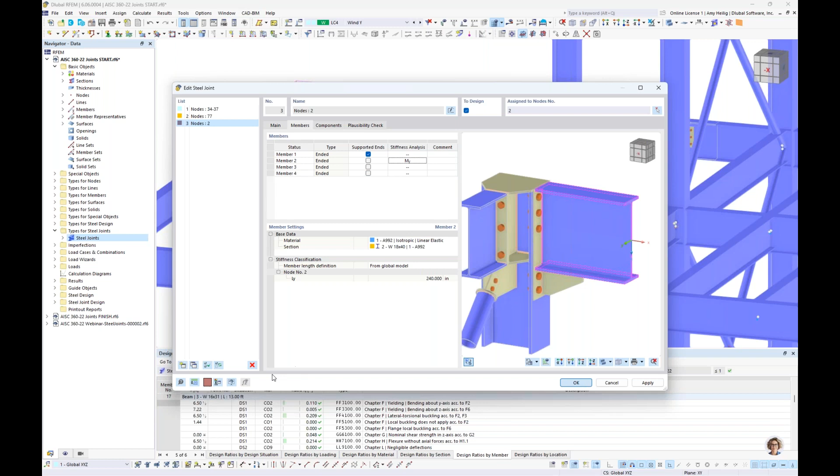And we can finally jump to the steel joints add-on within table format. Similar to last week's webinar looking at the steel joint design, we have our design situations listed.

We are only going to deal with the factored load combinations from that first design situation because we want to set this to the strength limit LRFD design. A lot of these others, other than possibly ASD, are going to be irrelevant and more applicable to the member design. Same concept for serviceability or unfactored load combinations - this isn't relevant for connection design, so we just leave this unchecked.

Under the objects to design, we will design all of our connections that we have defined today. This does take several minutes to solve, since we're generating these FEA models underneath the hood for all of the AISC 360 load combinations. So I will jump to an already solved model here that we can take a look at our results.

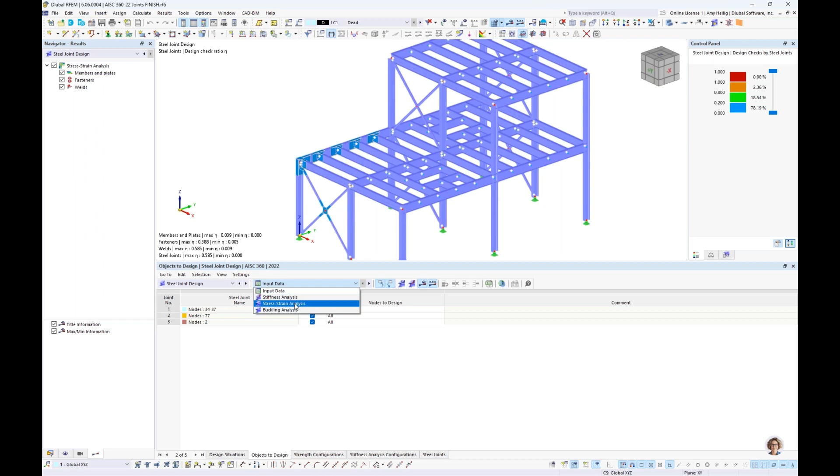Once that calculation is done, we jump to the steel joints design, and we have 3 different options to view. We'll begin with the stress strain analysis.

Zooming in to my various connections and taking a look at the design ratios by node, you'll notice that each one of my connections is available in table format. If we take a look at our corner connection, we have 3 different options, including the plate checks, bolt checks, and fillet weld.

If we launch the design check details for fillet weld, this should look very familiar because we also have these design check details available for the member design in the steel design add-on. But ultimately what we see here are the equations relevant for the weld design, listed line by line with the code references and our final design ratio.

You'll also notice that the directional strength increase factor is given here within these calculations. This is new within the 2022 code.

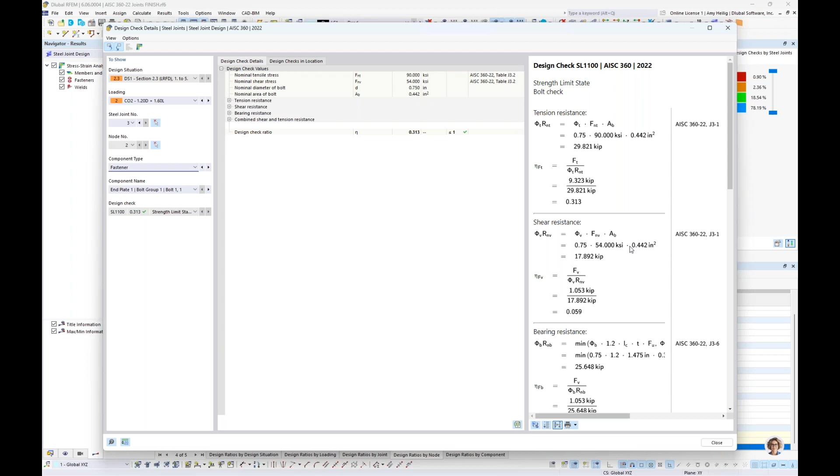We can toggle to the fasteners if we like, rather than going back to the table. You can see the bolt checks are given here line by line as well, and ultimately the controlling design ratio is shown at the end.

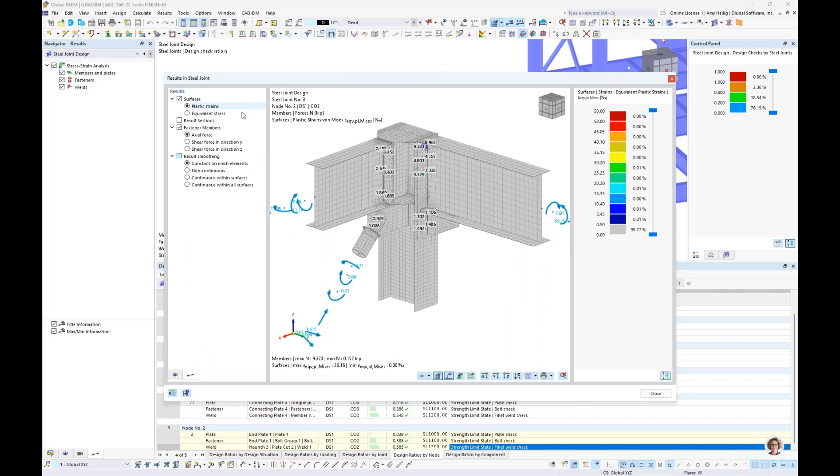Now for our plate checks, it would be best to take a look at what we call the Results in Steel Joint preview. This is going to launch that FEA submodel that we can graphically view. Under the second tab, you'll notice that the plastic strains are shown, and really there's not a whole lot going on with it.

So therefore, if we toggle this to the equivalent stress, it might be a bit more interesting to us, in that we can see the various stresses and where we have higher stresses on this particular connection.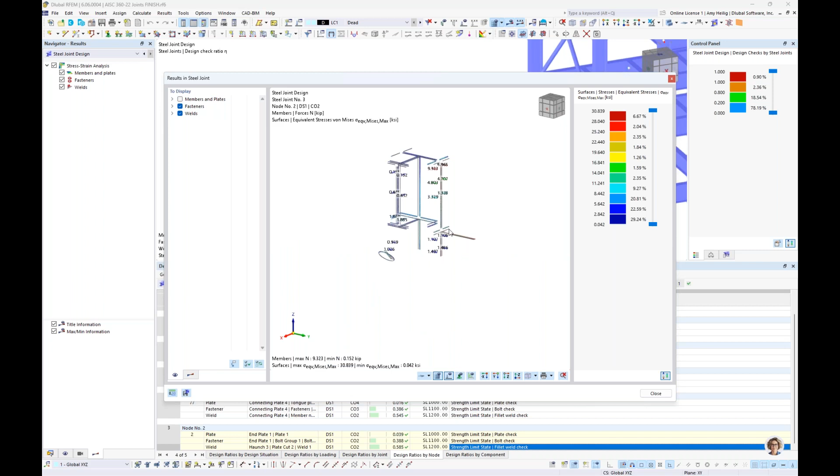Additionally, under this first tab, if we collapse some of these options, we have the ability to hide all of the members and plates, and perhaps we're interested in just seeing the stresses in the weld elements themselves, or you can see here the tension forces within the bolt elements.

You also have the ability to save this submodel to your computer, so you can then open it up like you would any other RFEM model.

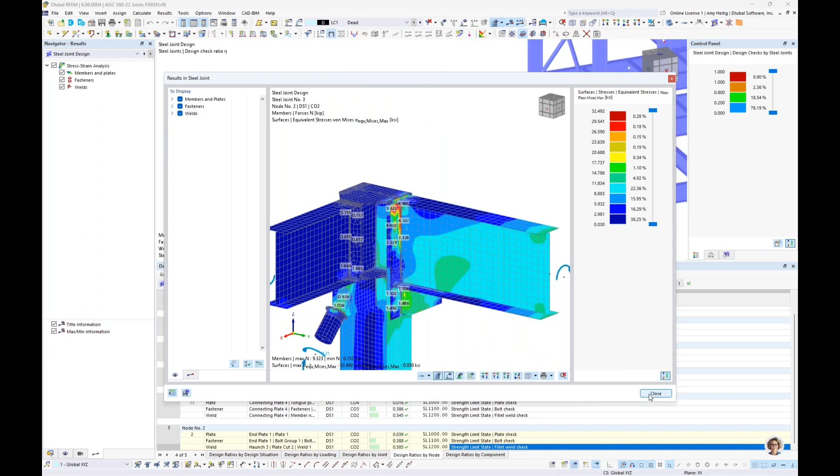To quickly show this, if we jump to this model that I went ahead and saved for this particular connection - now again, this isn't required, it's just if you want to save it and open it up in RFEM to take a look at what's going on underneath the hood.

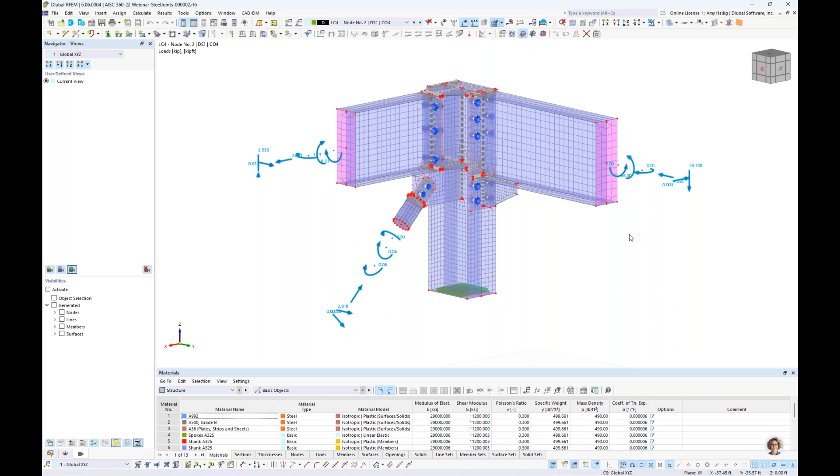You'll see here that FEA model fully modeled out within RFEM, including the nonlinearities, both material and geometric, as well as all of our different AISC load combinations. Those member end forces are automatically brought into this submodel, so as I scroll through these different load combinations, those member end forces automatically update here.

Now going back to the steel joints model, we have covered the steel joint results for the stress strain analysis. Remember that we've also carried out the buckling analysis because we've activated this under our various configurations. So with this in table format, we're going to see here our relevant connections.

For each one of these connections and nodes, we also have each load combination listed. For example, taking a look at my factored combinations for the gravity loads, dead plus live, I'm currently looking at node number 34, which is our beam to beam connection. We have 4 different eigenvalues that we've solved for, and for each of these 4 eigenvalues, we're also given the relevant critical load factor.

Very similar to the stress strain results, we can also activate here the results in the steel joints for the buckling submodel. We're probably interested to view what the various buckling mode shapes are going to look like. So here we see our beam to beam connection, and again, a separate submodel from the stress strain, in that we're only carrying out the eigenvalue analysis.

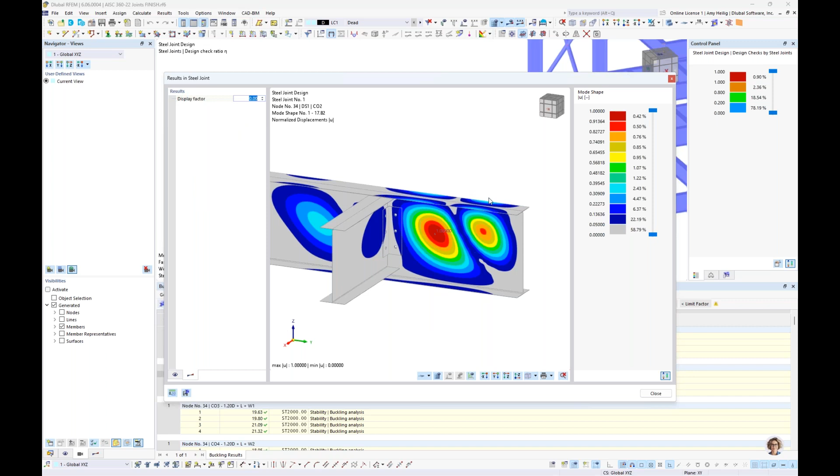Under the second tab, we can slightly increase this factor to see that possibly our web is going to buckle as one of our first failure buckling modes. We can also save this model, just like what we saw with the stress strain, if we're interested to open that up within RFEM as well.

But ultimately, for each one of these eigenvalues, I mentioned the critical load factor. This is the factor that we can multiply the loads in load combination 2 before we're going to see our connection fail with that particular buckling mode shape we just saw with the web. So obviously, the lower the critical load factor, the more concerned with buckling we should be.

The program can flag you at a specific value, input in the configuration, of what the critical load factor should be if it's not passing this. And then we could decide if we want to put additional stiffeners in for this connection.

Now, the final results are going to be that stiffness analysis. So here in table format, we see the connection stiffness calculation carried out for, remember, our connection here, but only for member number 2. We had set in the configurations for only the strong axis rotational stiffness to be carried out. We see 2 values here, a positive and a negative value.

These 2 values are different because it depends on if this member is in positive bending or negative bending. Again, if the connection was symmetric, we would see the same values here. But in our case, it's not symmetric, so we have 2 different values shown.

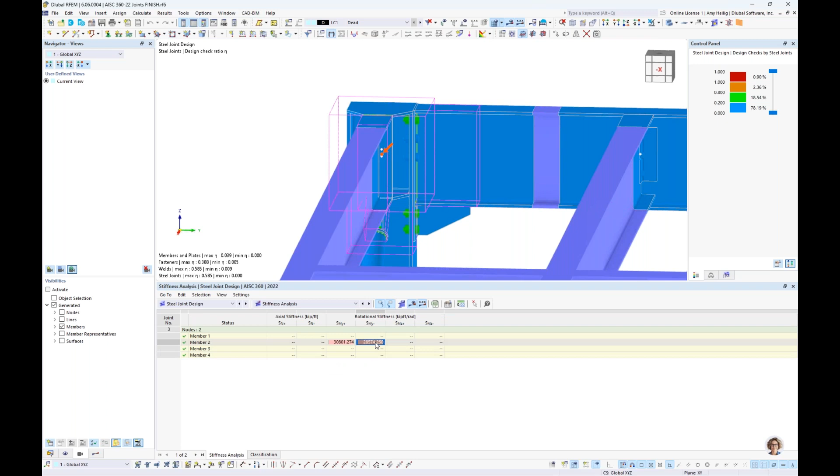Furthermore, under the second tab is the classification. We can see here how this was classified. It was both set to semi-rigid in the case of positive or negative bending. So therefore, I want to take this value here and apply it back to my global model.

Taking a look at this particular member, I want to hide the joint model, and I'm also going to turn this into wireframe view, but we only want to show here this particular member shown graphically. And I'm going to back up and go to the static analysis with all of my various load combinations.

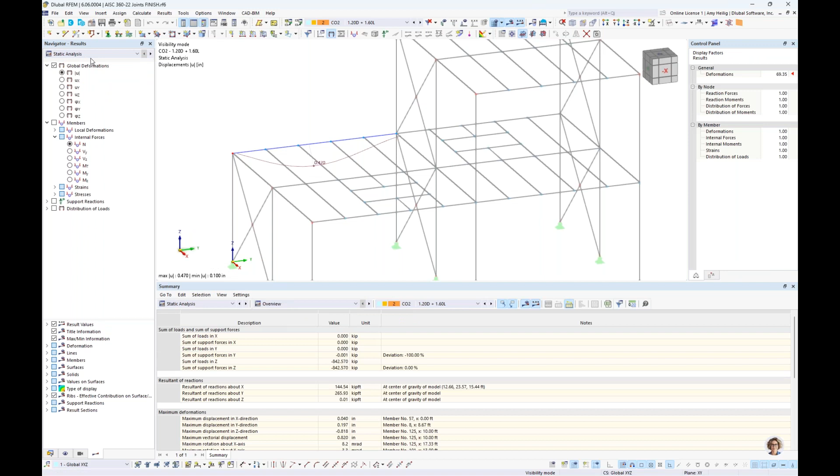So under my navigator here, I'm viewing my results. I toggle this to the static analysis instead, where I'd like to turn on the member internal forces for bending. Taking a look at my factored load combinations here, as I scroll through these, you'll notice that we have a negative bending connection point.

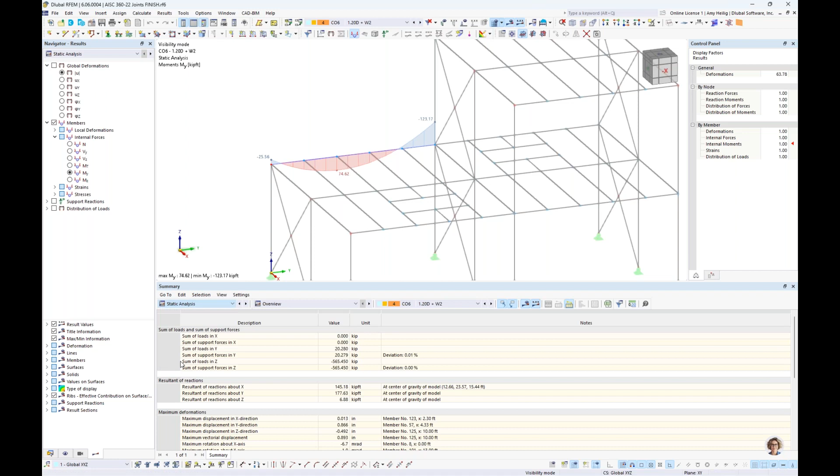So therefore, if I wanted to consider the true connection stiffness, I need to take the value back here under the steel joint design, and we want to toggle back to the stiffness analysis. I want to take this rotational stiffness with the negative bending moment value provided here. So we can hit Control-C to copy this value here.

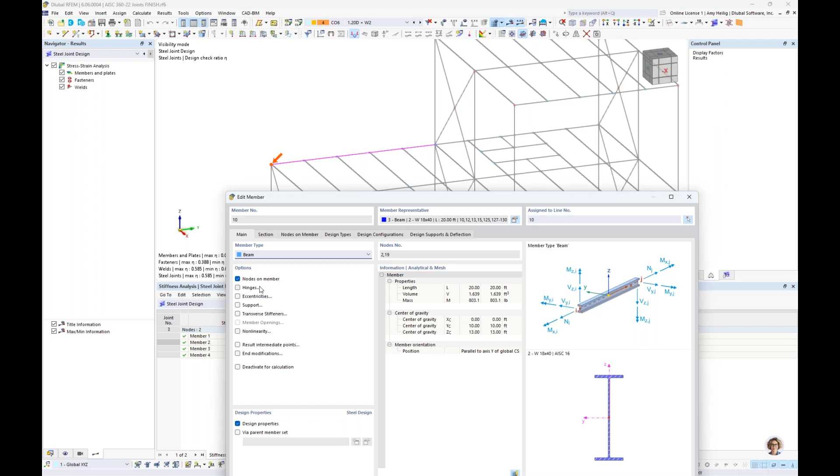I go back to the global RFEM model. Now, by default, because I have not set any member hinges for this, the program considers this a fully rigid connection. So therefore, we're going to activate here a member hinge definition, and I get a new tab where I can define a new member hinge.

This will bring up the dialog box, which has 6 degrees of freedom for this member end fixity. We're only concerned with the rotational degree of freedom for strong axis bending. So this is going to be in the local Y direction.

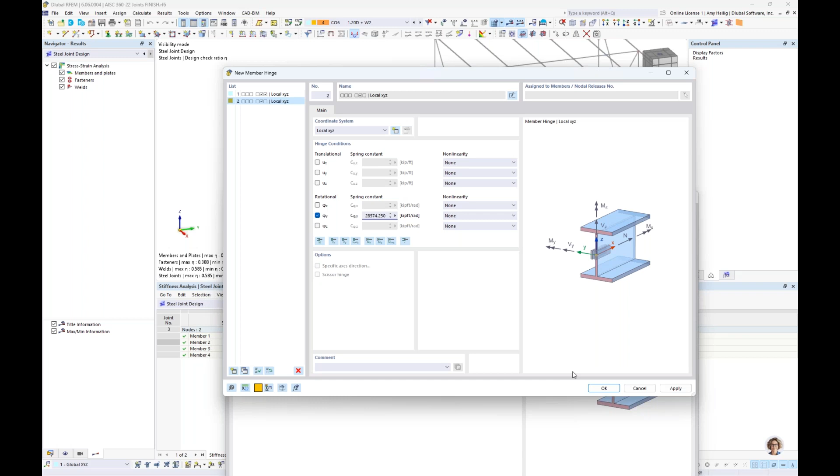Now I can hit Control-V to paste that value here into my spring constant, so now we are correctly accounting for the true rotational stiffness, the negative bending of this connection in the global model. When we click OK, we see that hinge definition applied here.

We click OK, and inevitably all of my results will be deleted here, and that's because we have this new member hinge defined. We would want to rerun the static analysis because now we will see a different value for our internal forces.

So it's planned in the future to have the program automatically export these out as member hinges, but for now, if you do want to account for it, it's easy enough to apply that manually.

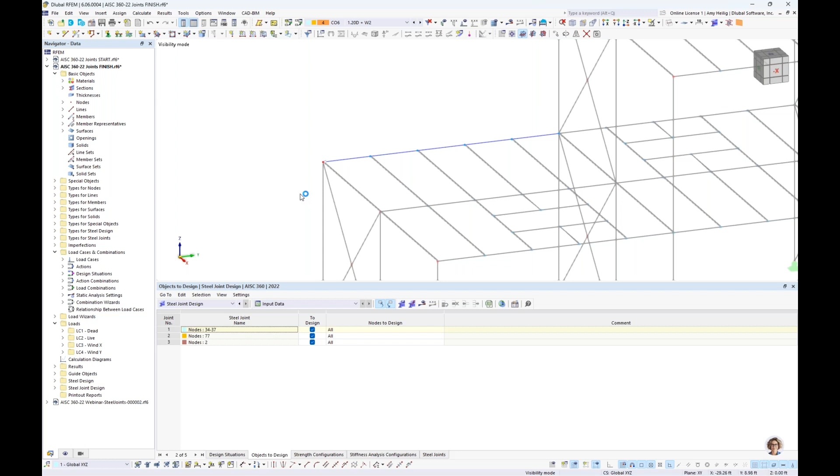All right, so let us go back to the PowerPoint to conclude today. I do want to end on a few future developments that we plan to implement in the near future. These aren't necessarily longer term developments, but ones that you should see very soon.

The first, as I mentioned multiple times, is the automatic export of that connection stiffness to the global RFEM model. But we're also working on AISC HSS through-bolt connections, as well as AISC base plate design.

We're just about ready to release this for Eurocode for base plate design, again including FEA with our concrete block. Everything will be carried out just like what you've seen in today's example for base plates. So after we release the Eurocode version, the AISC will soon follow.

And then some other developments, such as graphic display of dimensions just for easier component input, and modeling improvements - we're going to apply maybe easier insertion of members and plates. We'll see this added within the Steel Joints add-on.

And then probably more so under the hood is just calculation optimization - better generation of mesh, the details, and in general, the performance of those submodels.

And lastly, we are planning to completely overhaul this template library for all of our different connection types. We want to integrate them with the Dlubal Center. So probably some major changes you'll notice in the near future once you update RFEM as well.